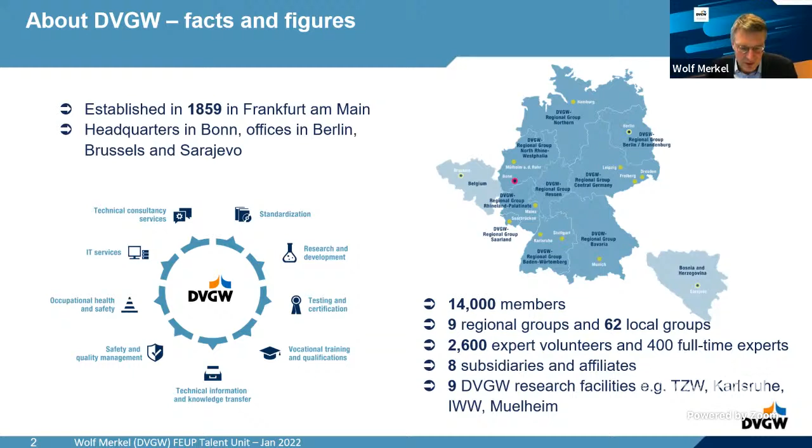So, now we're in the middle of the change in the water cycle, which is quite obvious for all the experts listening. It's due to climate change, economy and demographic changes. We have a development of technologies, digitalization, of course, is a main driver, but also we have in society, in politics, and in the public a growing awareness of the importance of water and why it is so important to take care of these elements. The other aspect, and this is also the point which brings us to asset management, is the aging infrastructure.

And this summary of different drivers for change provides challenges and opportunities for the water infrastructure. And I would like to illustrate this in the following presentation. When we talk about a regular asset life cycle, we also know that there are quite a number of influences which shape this life cycle, which are normal procedures in terms of degradation, which are procedures which come from the evolution of technologies, of the circumstances of drivers outside, and in the other direction, which come from disruption.

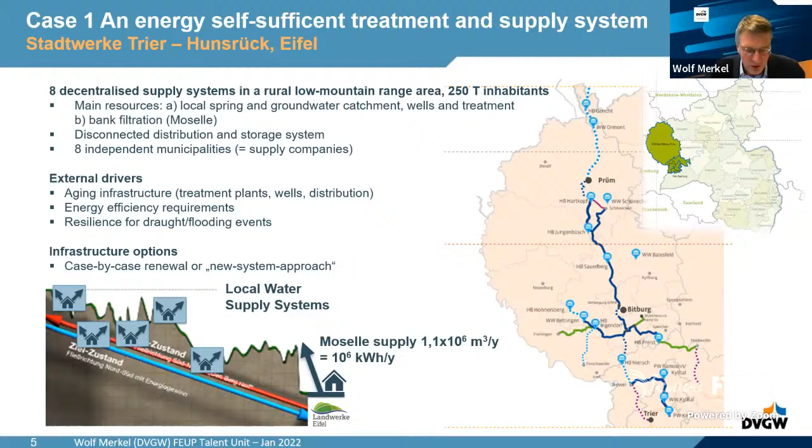These decentralized systems provide the water for this or for another valley. They were not connected in the original state. The external drivers for replanning or rethinking the whole system were the aging infrastructure as a whole. That means treatment plants, wells, and distribution were in a state where reinvestments were needed. The next aspect is energy efficiency requirements, and the third is resilience to drought and flooding events, which occur more frequently in recent years. So the infrastructure options were a case-by-case renewal, so each system renewed by itself, or a new system approach.

And the new system approach looks like the following. What has been established is that we make use of the basic slope we have here, starting from this mountain area and using the water provided from a reservoir which provides a water amount of 1 million cubic meters per year. And the second part of the idea is to connect all the downstream systems into one system. That means the main part of the 1 million which is needed here comes from above and is then flowing downwards to the last supply area, which means that we save the energy required for pumping up the water from the Moselle area, and we also have the opportunity for energy recovery throughout the whole slope in different installations.

That means there's, of course, quite a lot of restoration and renewal work, but the overall system at the end is much more energy efficient, and it's also much more resilient to flooding events. There were also additional benefits generated from parallel construction of gas and biogas pipelines and glass fiber lines, and all this contributed to the overall financial revenues generated in the system. You see here the figures of the total investment, including subsidies and loans, and the astonishing part is that the business case was positive after 5 years. So really, an engineering approach which made use of all the knowledge we had from the systems.

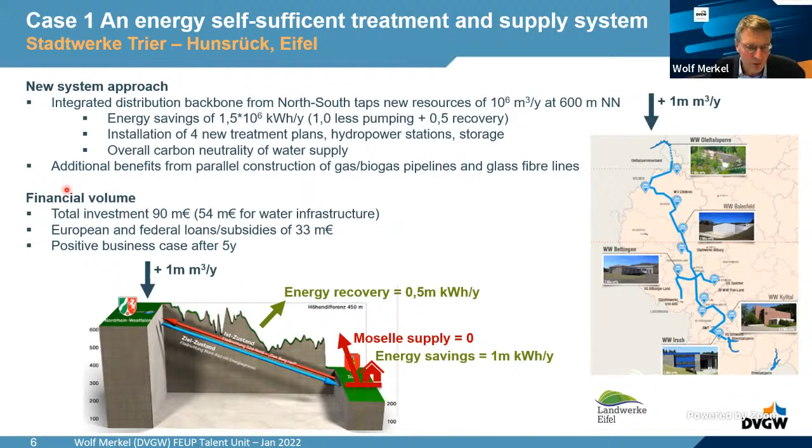And of course, there were quite a number of aspects relevant in terms of asset management, which are summarized in these slides. The asset management part is that we needed a technical evaluation of all the assets available and an estimation of the asset value.

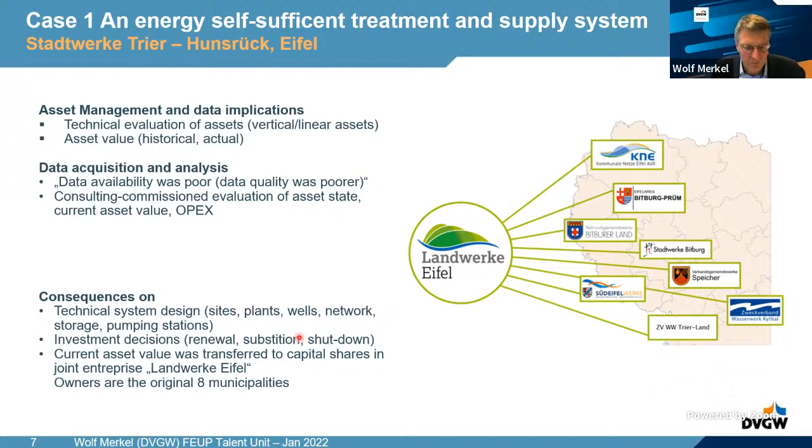The reason for that was that the asset value was transferred to capital shares in a joint enterprise, which was then formed based on the original enterprises on the landscape. And for that reason, we needed technical and also economical estimation of all the assets. There are much more details on that, but I think the case is illustrated for now.

I would like to move on to cases 2 and 3, which is also a mountain range area in the northern part of Germany. You see here the shape of Germany. It's in the northern part. It's the provision of water supply to the metropolitan area of Bremen, which is situated at the coast, and the larger amount of the water supply comes from a mountain area about 300 kilometers from that area, a middle range mountain area called Harz.

There's an operator here, the Harzwasserwerke, which provides water via a system of 520 kilometers of transport lines, and also operates a number of water treatment plants on the way, which also contribute to the overall amount of water transferred into this metropolitan area. What were the drivers for the aspects we're talking about? In case 2, we will talk about degrading raw water quality, and in case 3, the aspect of rethinking the overall

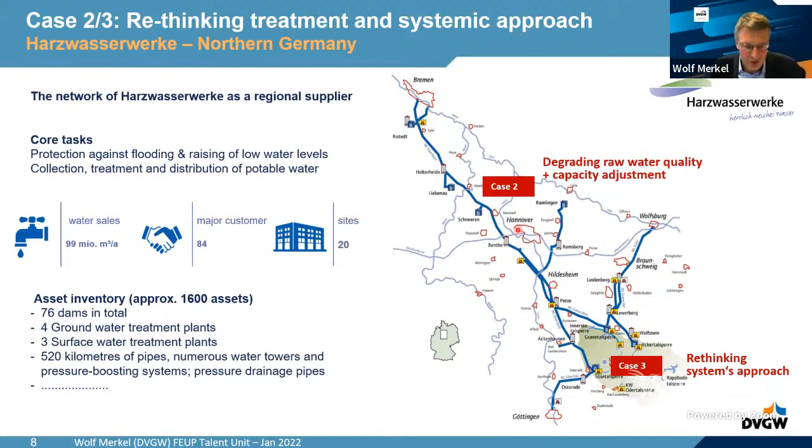function of the system. For case 2, the background and main issues for consideration were several: climate change, and extensive drought monitoring in the last years. You see here the results from the groundwater level monitoring in past years, and obviously the red parts are much lower than the historical standards, posing a problem for groundwater exploitation. The second aspect is increasing demands in metropolitan areas.

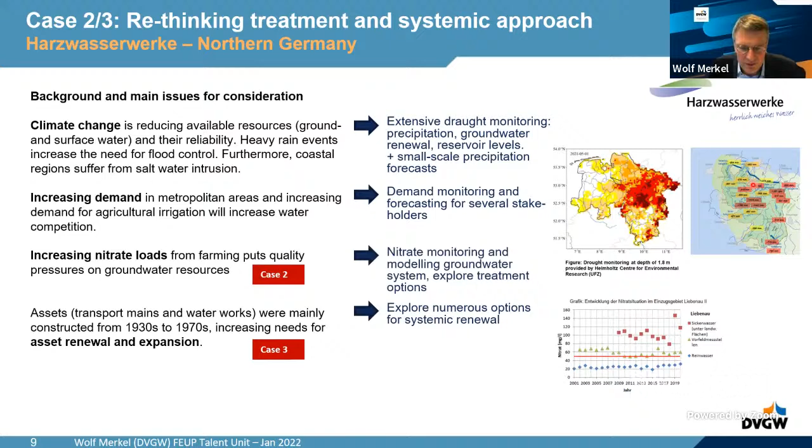The third driver is increasing nitrate loads from farming, which puts pressure on the quality of the groundwater. And the last part is that the assets, which stem mainly from the 1930s to 1970s, need renewal and need expansion in terms of the higher need up north. So in case 2, we would like to look a little closer at increasing nitrate loads and renewal options for that supply area.

This is the groundwater area for one of the groundwater treatment plants, and you can see here the wells and the measuring results for nitrate, and the indicators show that in the western part the nitrate levels are rising from year to year. Here in the left part, above 50 milligrams per liter, above the limiting value, and in the eastern part increasing as well. So we have external drivers: rising water demand for supply and irrigation, and climate change, increasing pressure on the system.

In all these areas, we have increasing nitrate concentrations, and we show that the denitrification potential in the ground is diminishing. So what are the options explored one after the other by the operator? The short term is changes in the extraction regime to make use of the different concentration levels. So take more from the eastern part and reduce the nitrate concentration. The medium term is to explore new well sites with lower concentrations and to start planning on reverse osmosis treatment. Technically, it's feasible, uses a lot of energy, but one crucial unresolved aspect is the concentrate discharge for these kinds of installations.

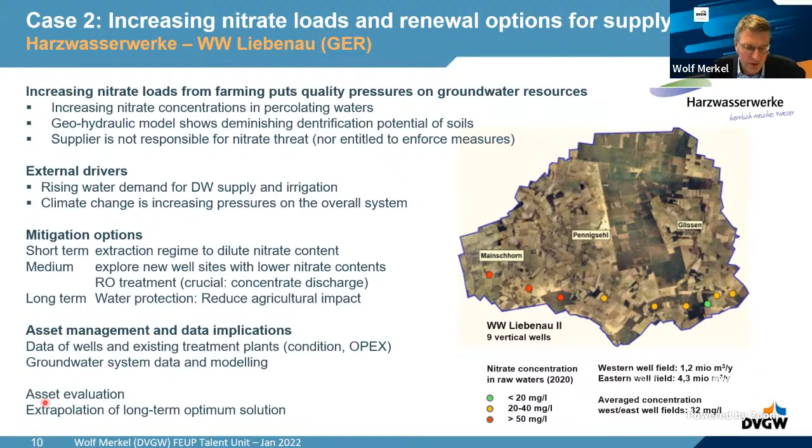The long run is, of course, water protection, the reduction of the agricultural impact. This is the only sustainable solution for this aspect. So what is involved in terms of asset management? All the existing wells have to be evaluated. The groundwater system has to be reviewed with the system data, modeling has to take place, and then asset evaluation is important for driving all these solutions in the right direction.

In case 3, we're talking about rethinking the whole system. The Harzwasserwerke, as I introduced in the beginning, have a multifunctional system approach, and the solutions for this change and the drivers lie in different dimensions: use management, resource management, asset operation and asset management. There are a number of measures described for each of the sectors I introduced. I will concentrate on the aspect of asset operation, and introduce one of the ideas followed by the operator.

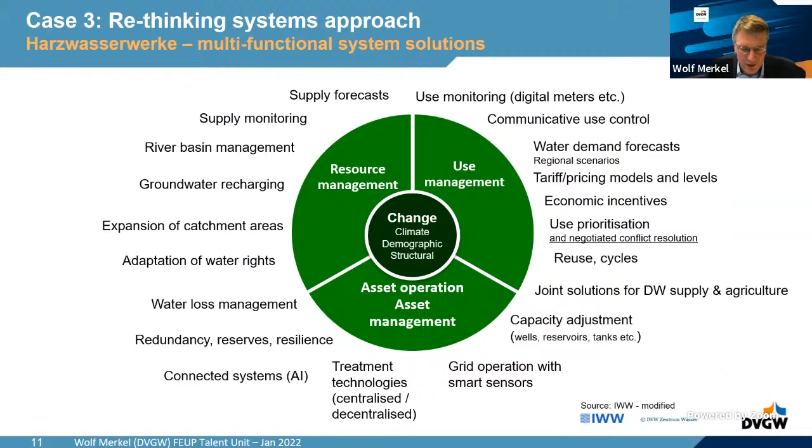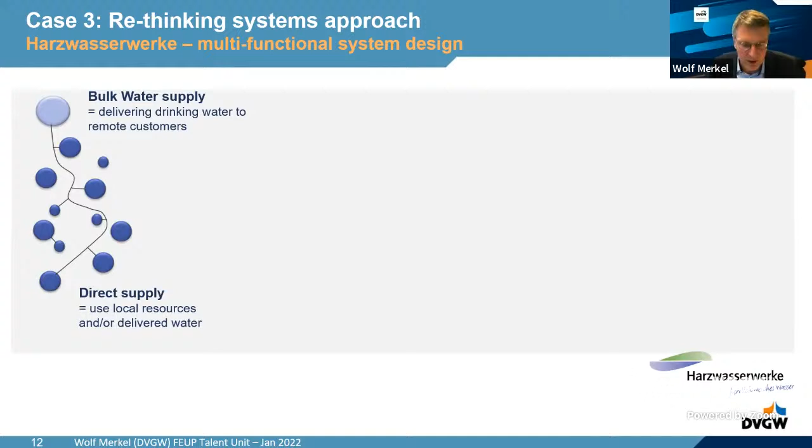A classical approach of bulk water supply is you take water from one central part, a reservoir for example, and then distribute it over your transport grid to the direct suppliers, which distribute it in their municipalities and villages. And the new idea the operator is exploring right now, at the beginning, is to use this distribution network as a distribution platform for input and output volumes.

That means that the direct suppliers, which were originally supplied by the bulk water and have their own resources, also have the potential to provide input water into the system. So you use this as a kind of backbone for distributing water in the whole area and make use of the different climate and weather conditions you have in a certain region. So this is rethinking the whole system.

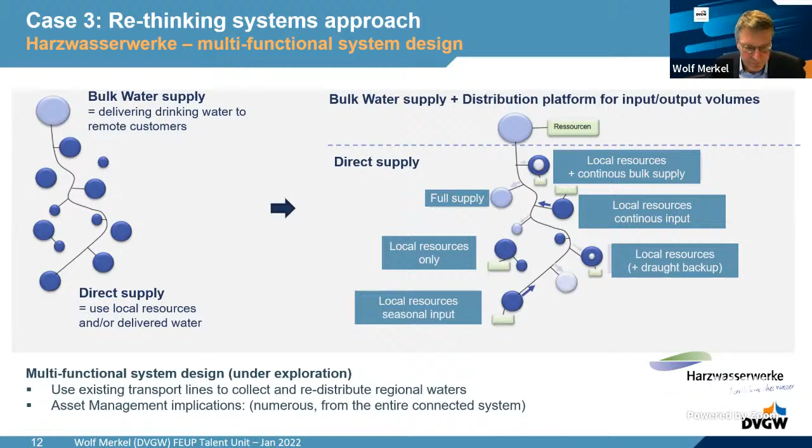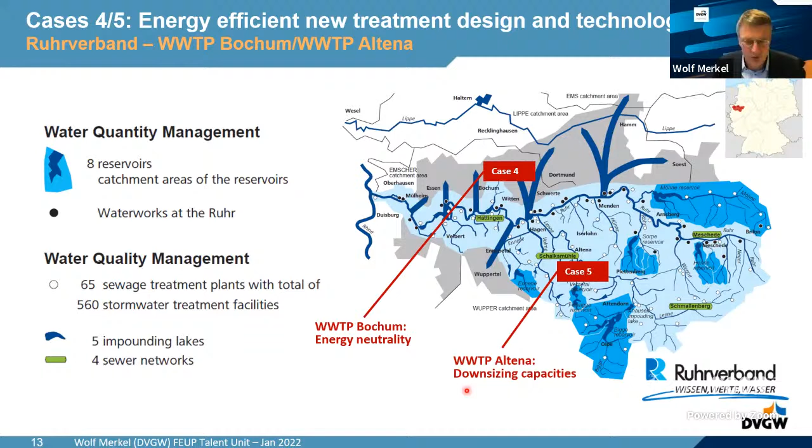Of course, it has several implications on the asset management part. So far for case 3. Cases 4 and 5, with the aspects of wastewater, I will skip here. They are an example of energy neutrality for a large wastewater treatment plant and downsizing capacities in a certain circumstance by using a new technology.

But I would like to move on to case 6, multi-effects of climate change, resilience needs in the case study of the Bodensee Wasserversorgung. Bodensee is Lake Constance in the southern part of Germany. Here again, southern part of Germany, Lake Constance is here close to the border of Switzerland and Austria.

As you can see here from the diagram, the water from Lake Constance is pumped over 200 kilometers and provides water to the metropolitan region of Stuttgart and of course to the neighboring cities. It is a yearly supply of 130 million cubic meters for 4 million inhabitants. The Bodensee Wasserversorgung is a public entity which is owned by the municipal members.

They have a large pipe network and one water treatment plant with a classical surface water treatment scheme: microsieve, ozonation, filtration, and disinfection. What are the pressures and drivers for this company? Climate change makes the lake fluctuate in level.

There are increasing peak demands, and there is an invasive species, the quagga mussel, whose larvae enter the water treatment plant, so that there is filter clogging, and the cleansing efforts are increasing from year to year. We have pressure on the raw water quality, as in most surface waters, and vulnerability for contamination at the single inlet point. I come to that in a minute. And the asset life for many of the components is at the technical limit. So it's time to rethink the whole system.

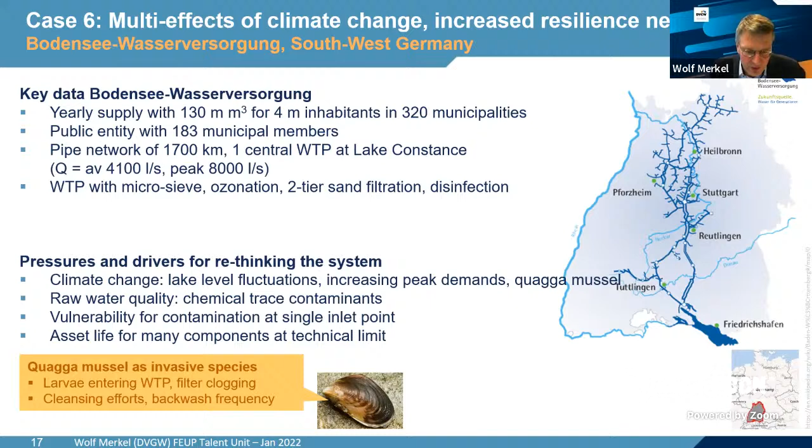What is the approach the company has taken? The new concept means to install 2 separate lines with a pre-ultrafiltration. This pre-ultrafiltration is mainly to keep the mussel larvae out of the system. What you can see here is the picture. The water treatment plant is here on the top of the mountain, about 300 meters above lake level. This is due to the fact that the city of Stuttgart, where the water is supplied, is also more or less in this range, so it makes sense to make use of this altitude.

And you can see here in figure 1, this is the existing single inlet point, and this will be doubled by a second inlet point in the future. And this is the whole system, how it would look in the future. So 2 inlet points with 2 separate ultrafiltration lines before the water treatment plant. Of course this is a large-scale project with installation of the pipes, providing electricity in this area, and overall you have to ask quite a number of people with stakeholder participation. You need several permits in terms of conservation, protection, and heritage of the whole area.

The overall investment will be several hundred million euros, and there's an estimated raise of the water tariffs. This is more or less the project as it will develop. This will last from now to the year 2036. So it's really some sort of half-a-generation project for this renewal.

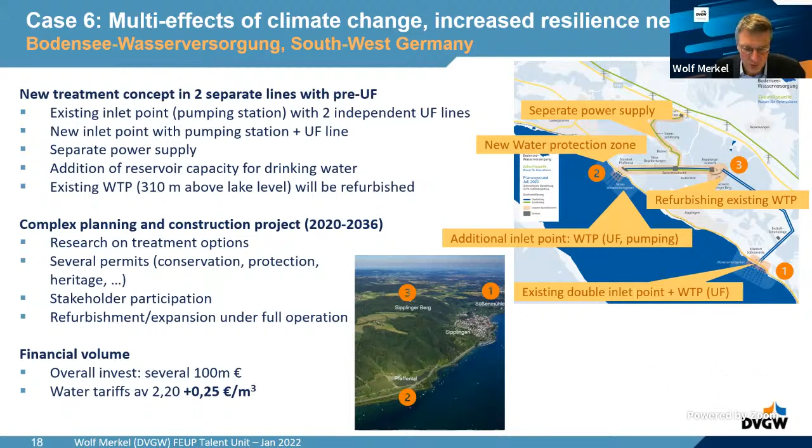The last example I would like to introduce is more interesting in terms of the approach followed. We have a planning objective of the new waterworks, design criteria were specified, but there was a planning exercise for this waterworks which had not really led to the optimal results. And the alternative approach, which was then followed by the operator, was that they installed a function-based design process following the framework of value management. And I think this is interesting enough that I provided the

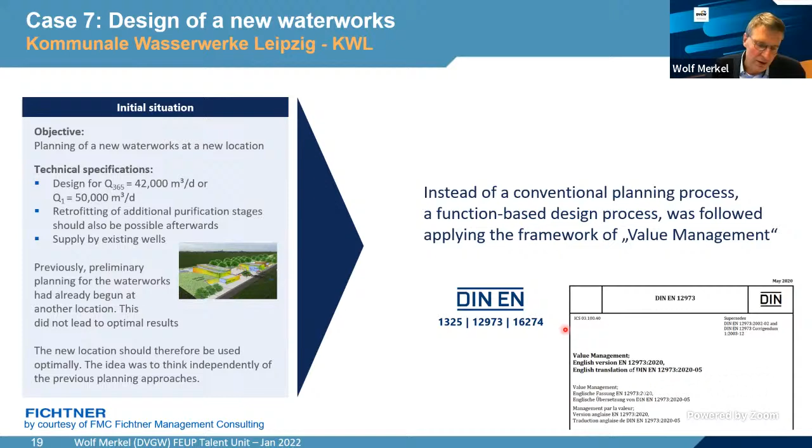European standard on that. The basic idea is that you develop alternative options for solving the design problem in terms of different solutions, and then consult a panel of experts, about 10 to 15, and ask them for their evaluation and advice. Of course, you have to plan in a certain way, you have to make cost estimations, but by this means you're looking closer at solutions and at different approaches of finding the optimal way. In short, the result was that the concept was developed into a more cost-effective alternative, which saved approximately 2.5 million euros compared to the original design.

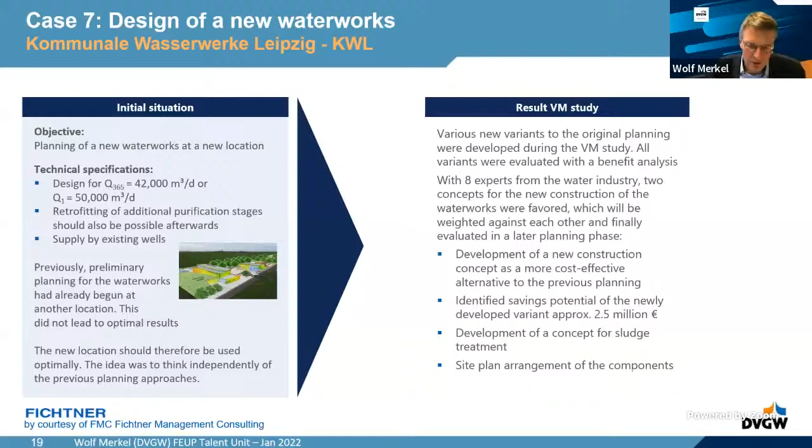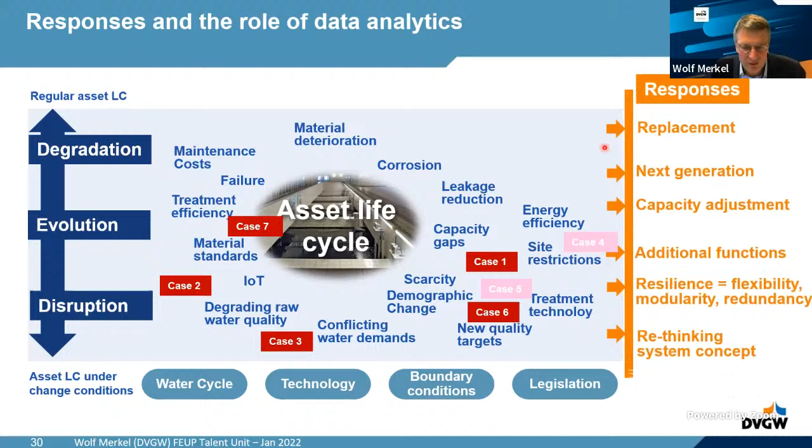And well, not important the results, but I think the approach is important for maybe a closer look. Yeah, and then I'm short for the summary. I tried to introduce the different cases in terms of what are the aspects of asset lives and why it's time to rethink the whole system. What are the answers, responses we have available for that? They start from replacement, from installing next generation technology, from capacity adjustment to provide additional functions if needed, to the aspects of higher resilience, and up to the point of rethinking the whole system concept.

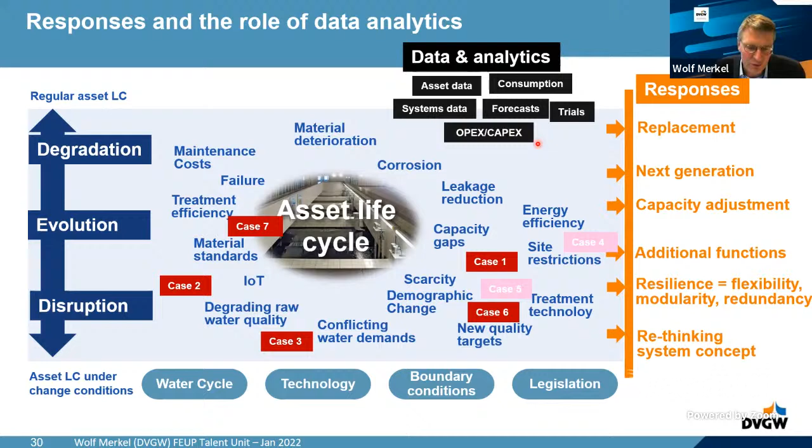I try to illustrate some of the examples by using these case studies. The data requirements are quite heavy in this aspect. You have to look for asset data, for the consumption, for systems data. You need forecasts for several parameters. And of course, in most of the cases, some trials beforehand are advisable to go in the right direction. And of course, we need an economical evaluation.